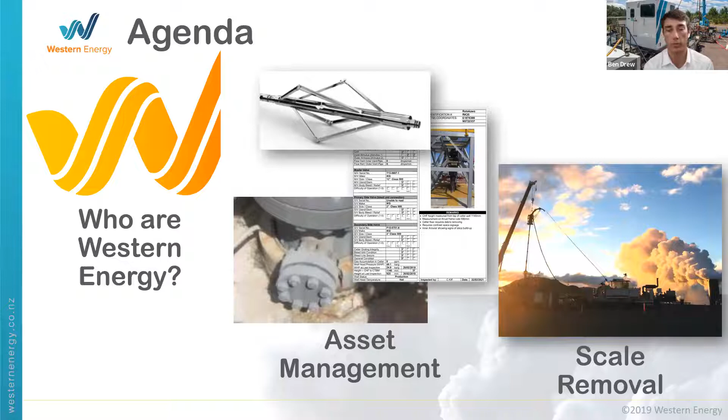Contact Energy and Western Energy have a very strong partnership in pioneering new techniques in scale removal in live geothermal wells. And I want to talk about that because it's really one of the success stories of our business. So to get started, Western Energy started in 2005. The 2 founders of the company, Paul and Dane.

So I'm just starting a little timer here so I don't talk too much.

The founders, Paul and Dane, they were working in Taranaki in the oil and gas industry, and they did have to come to Taupo to do different well services. And what they found there was that some of the clients were really crying out for more support, and they saw that as an opportunity and decided to invest in some equipment and provide some geothermal focused well services. And that's really where the core values of Western Energy started, this customer focused business and innovation and problem solving.

So they started off doing some initial works, you can see in the slide there, on capillary tubing, with a wireline unit doing logging activities. And as they engaged with customers, they found more and more requests for different services. So as we progressed more towards 2010, they started doing scale broaching. So that's where you deploy tools on the wireline or the slickline to remove scale from wells. We did some production testing.

So that's when they've drilled new wells and they want to measure reservoir parameters and test the production capacity of wells. And then later on, things would come out of that data analysis and the data that they got from those wireline and slickline activities that would, I guess, for the operators, say, well, now we need to do a workover.

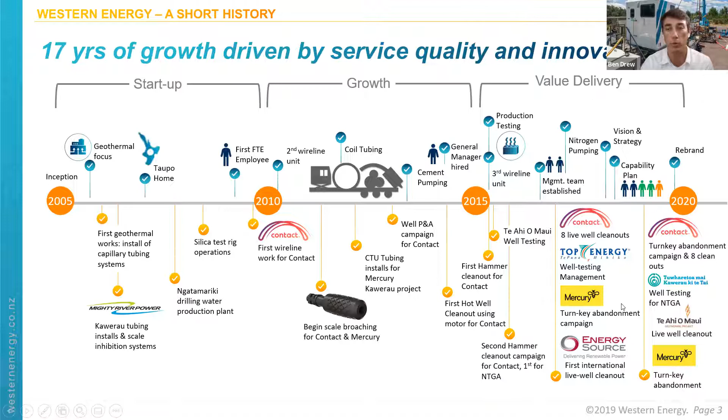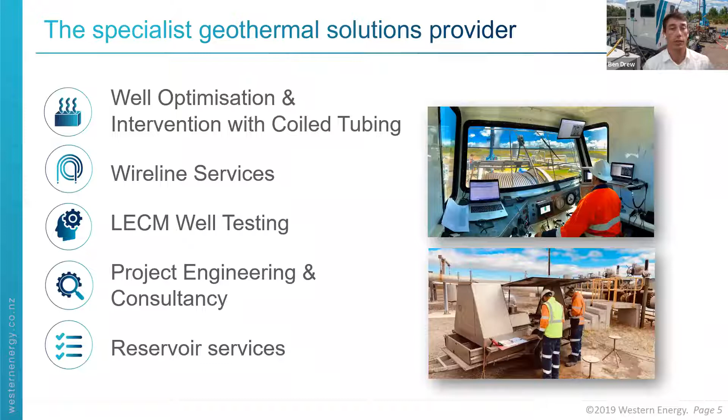The third one there says LECM, but essentially that's well production testing. The bottom one, reservoir services, is this sampling and tracer flow testing, and there's sort of a picture of our equipment there in the lower right. And then the one I'm really focusing on a lot today is the project engineering consultancy, because we're finding at the moment that's really driving demand for all the other services.

So jumping into asset management, this is the first sort of main topic of today. And what we've found recently, I mean, traditionally, Western was delivering these services, getting temperature data, pressure data, abandoning wells, and we're involved in just the conveyance and delivery side. But being able to work for multiple operators means we get exposure to all sorts of different well conditions.

And clients are finding more and more that having insight into how to manage their assets and make those decisions is something they really want, but having time to put all that data together in a meaningful risk-based way has been difficult. So I'm going to talk a bit about some of the services Western has that contribute to asset management.

So firstly, I want to talk about well access. When you have your own well, understanding what's inside the well is very important. On the left, I've got traditionally the way customers would assess well access. If you can't get to the bottom of your well, then there's possibly something you need to address. So there's this equipment there that you can see says a gauge ring. Some people would refer to it as a go devil. And you run this equipment with different sizes into the well so that you can see how far it goes.

For example, you can see there on the top it says diameter. So if you run that 8-inch diameter tool, it gets down to about 180 meters and stops. And then you run the smaller one. You can see in that diagram, if you follow the number 6 down to the bottom, it has finished there at about 170 meters. And then the smaller size goes a bit further. This is okay. It gives you an idea of what obstructions might be in your wellbore, but you don't know what's below that.

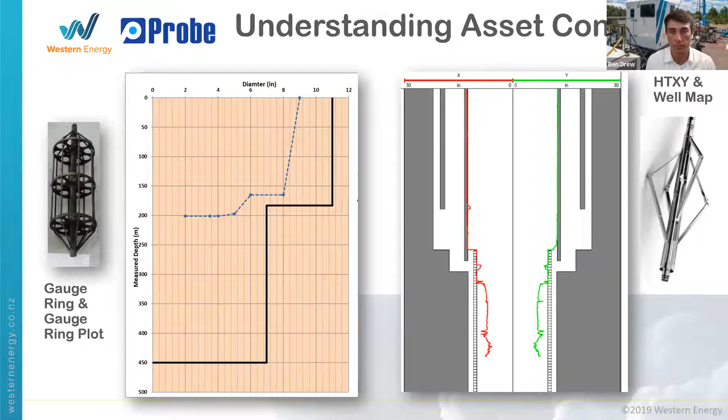The next one I want to talk about, and I believe the author of the pictures on the left is actually on the call, which is pretty cool. This is one of the newest services Western's delivering this year in wellhead asset management. Coming back to what I said, in New Zealand we have a code for how we monitor and manage the safety of our wells. That's New Zealand Standard 2403, and it has some broad recommendations about how operators should monitor and maintain their wells, and how it should be risk-based.

And we found clients in New Zealand have been interested in moving their monitoring and maintenance plans away from something that's more reactive to something that's more proactive. I've got the images on the left there to show you. If you go to this paper and read it, it's really amazing the repairs that they've done to these wells and the engineered solutions they have to repair some of the corrosion on wells, particularly near surface corrosion. But what our clients have expressed to us is they'd really like to see these things happening or get evidence of that corrosion happening before it gets to the point that they need to do a repair like that.

And that aligns with some recent literature. I used the paper there on the right that talks about well integrity management plans and how, if the approach to well integrity management is different, you can actually reduce the frequency of failure and extend the life of the wells. And we know, in a competitive energy environment, using those geothermal assets for longer and ensuring that fewer, less expensive repairs are done over time is key to making those assets last. So how's Western involved with this? Just last month, we started sending crews out to do those wellhead monitoring inspections.

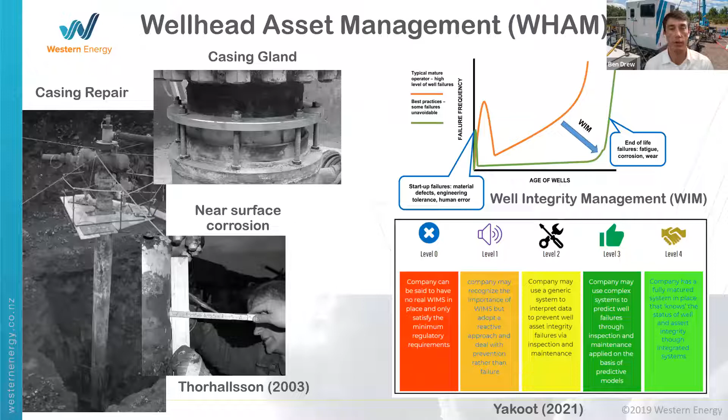So the next thing that comes out of that: we get some downhole data and we advise that to the client. We're now getting wellhead and surface data and advising that to the client. And the next step the client's been asking us is, okay, well, I need to organize it. I need to assess it. What's the next step? And they have resources to do that. But like I said, they're focused on maybe a new power station or other value-added projects for their business. And they want to make those decisions, but they don't necessarily have time to put all that data together.

So Western Energy is providing, at least in our engineering team, services for data gathering and assessment, whether that's going through downhole data, camera surveys, whether that's modeling the wellbore and workover modeling to see what tools would be more appropriate to clean their well or abandon their well, doing risk-based calculations, making decision trees and cost-based decision trees for them to make those decisions, and then meeting them face-to-face to go through that data.

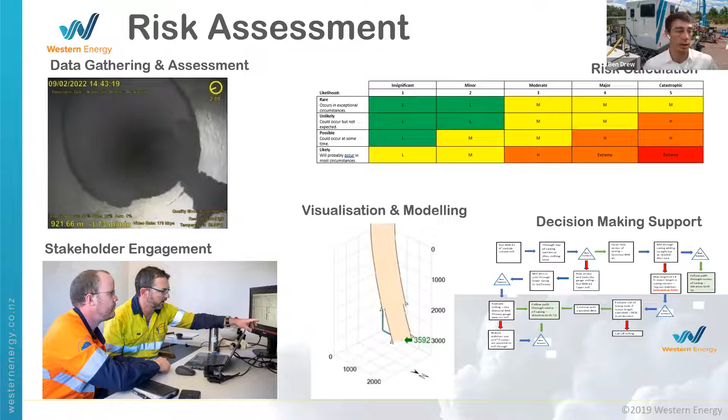And another part of asset management that ties in is well decommissioning. As you can imagine, there's a lot of suspended wells around the place, and often the ones that are left suspended are because they're tricky to abandon. And this has been one of my favorite projects actually at Western, because these suspended assets stay on companies' balance sheets and hold up provisions that could be used in other ways for the business. And that's because they're tricky and in difficult places.

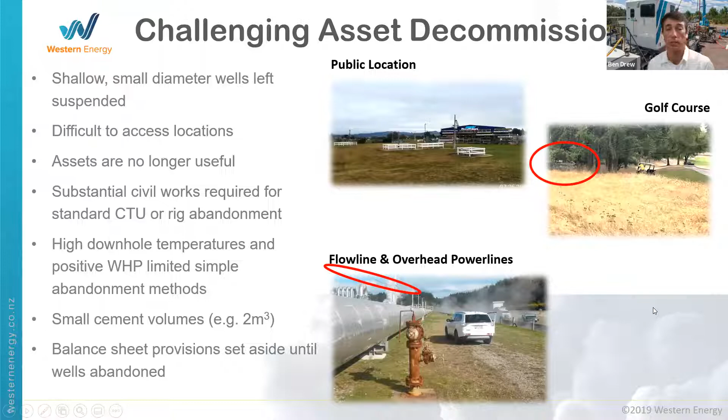So Western took this as a challenge, and we've used some of our existing equipment to help develop these without the conventional approach to abandonments. We don't need to do lots of earthworks. For shallow wells, often it's easy to bring a cement truck in if they're not too hot. But a lot of these suspended assets are left there because they're difficult. They're small cement volumes. The temperature's still hot, so you can't use conventional cements from just your average construction cement company.

And so Western pioneered a kind of package. We use this 3/4-inch tubing, and we use our wireline unit, and we still use our conventional cement equipment. And this was us abandoning that well there, WKM02. Now, there've been multiple iterations of figuring out how to abandon this well. You can see there's this big lagoon on the side, so making earthworks to get a rig or even a larger coil tubing unit was difficult. You had the power lines along there, the flow line as well. But we were able to find a way to put this 3/4 tubing on the wireline unit, implement a bottom hole assembly and still use our conventional cementing equipment to abandon that well.

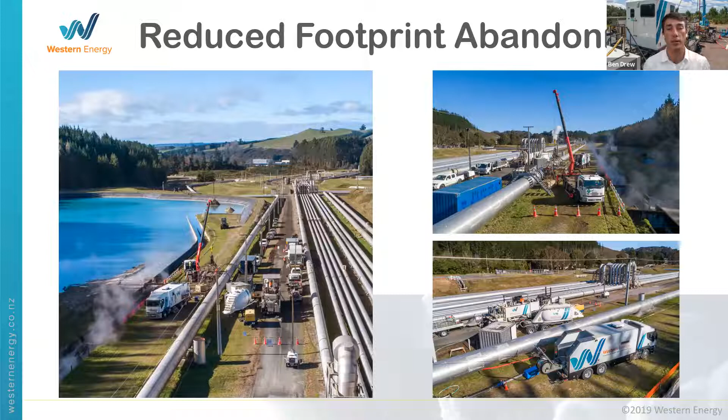It was very successful, and now there's, I think, about 7 of those shallow monitoring wells in difficult places that we've now abandoned using that method. So that's been a really successful part of asset management as well, because abandonment is part of that, finally closing out that asset once it's no longer needed. And I think that's what I've got on asset management at the moment. That went a bit quicker than I thought.

So we'll move into live well cleanouts. Live well cleanouts is the tagline that we use for scale removal using a coiled tubing unit that we have. Traditionally, as I'm sure many of you are aware, geothermal wells develop scale, and traditionally a rig would be used to remove that scale. So I've got that picture on the left there. It's a lot of equipment.

You also have to quench the well, which means that you need to cool it down. You need to remove pipe work, and those thermal cycles, when you quench the well to cool it down, fatigue the well, and there's only a limited number of cycles before some casing damage will occur. So clients push a lot to not have to quench their wells for these kind of workovers.

I guess one option is the middle one there. You could use a slickline unit. You could use broaching. That involves these kind of jagged tools in the middle column of the pictures there to chisel off the scale, and that's been effective. But in larger sizes, it doesn't seem to be as successful. The bit and scraper is going to clean more scale there. However, on the right hand side of the slide, with LWC, which means live well clean out with coiled tubing, you get to keep the well live, but you still take advantage of the bit to be able to clean the scale better.

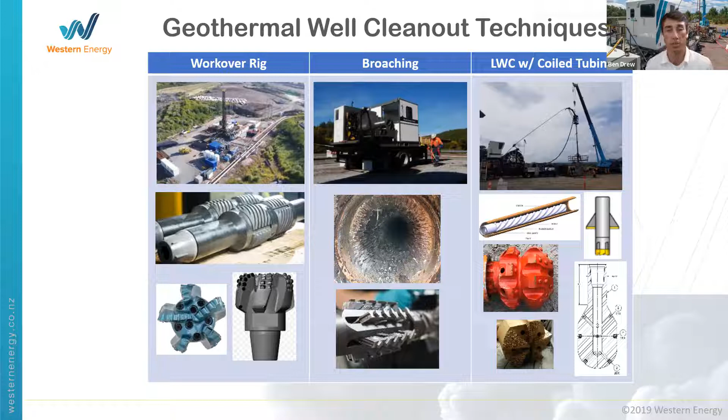So I mentioned before, there's some advantages of having all that pipe connected on one continuous string, and that's that you can actually leave the well flowing. You don't need to quench it to be able to clean the scale. And with the well flowing, that's providing transport of the scale. When you clean it with a rig, unless you can get suitable flow, that scale might often fall to bottom, and the last step of the rig clean out might be to vertically discharge that well and blow all the scale out, and you might not get it out. But when that well is flowing a couple of 100 tons an hour and you're cleaning out that scale while it's flowing, all of that scale is being removed to surface. And I have some pictures later to show you what that looks like.

So, like I said, with Contact Energy and Western since about 2016, I think we started doing clean outs with different motors and mills. A big alignment between Western and Contact is our drive for innovation and drive to make geothermal fuel cheaper, and giving us the confidence to fail and to try things, because there's not a lot of lab testing you can do for cleaning scale at 300 degrees C. So being able to have the confidence to go in and engineer a plan to clean scale, it's a real credit to Contact Energy that they partnered with Western to develop that.

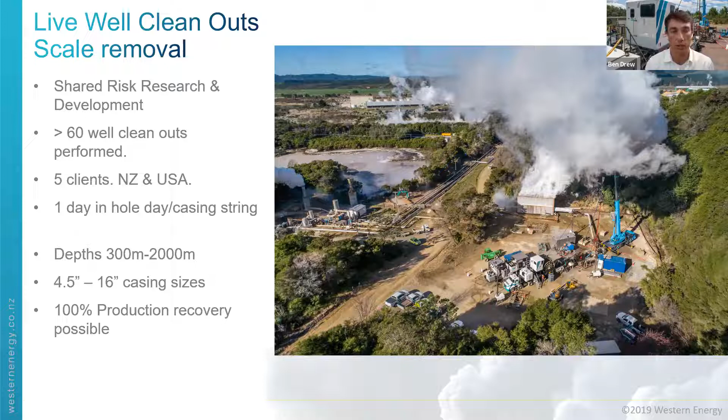I've included, for those people more interested in technical detail, some of the well specifications there. I think we're kind of getting close to time, so I'll just quickly jump through the rest to show you, for those people that like data, why would you use a live well cleanout?

Well, if you use a rig and it takes weeks to get mobilized and rigged up and back and install pipelines, you're kind of looking on average at, and this data is from our customer, by the way, this isn't data from Western, 42 days to do a clean out with the rig, whereas with the live well cleanout, you can do it between breakfast and dinner.

You can turn up the day before, set up your equipment, 8 o'clock in the morning the coiled tubing rig's in the well cleaning scale, and it's out of there by 4 o'clock in the afternoon, and your well's still on full production. So that's a huge change in efficiency in planning and cleaning scale from wells.

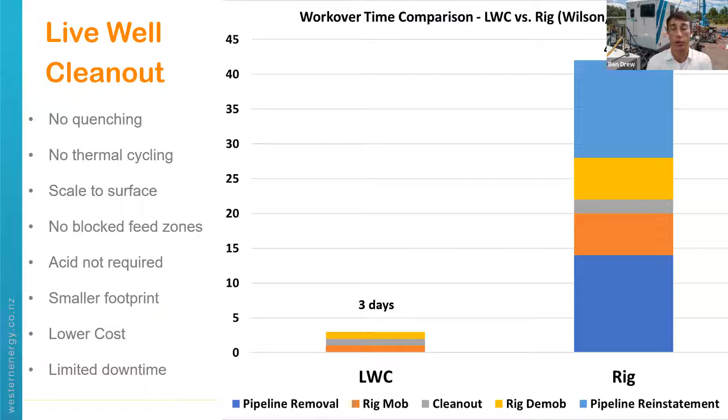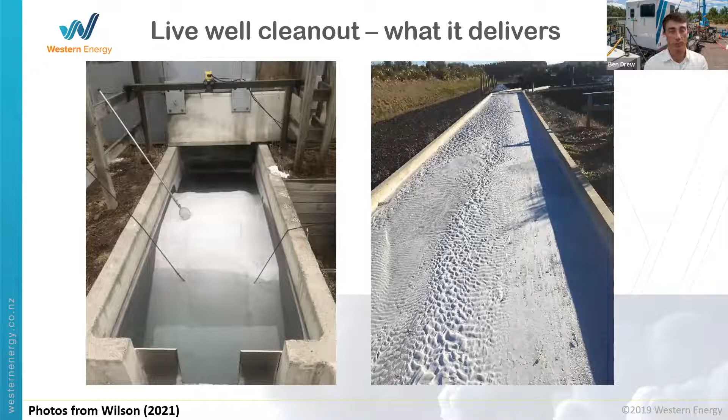That wraps up what I want to talk about today. So to recap, I talked about Western Energy, who we are, our staffing capabilities and services. I talked about asset management, what we're doing in terms of downhole data, wellhead asset management, risk assessment, and asset decommissioning or abandonment.

And then I talked a bit about live well cleanouts and how they can really change your geothermal business and how they're driving down the cost of geothermal fuel.